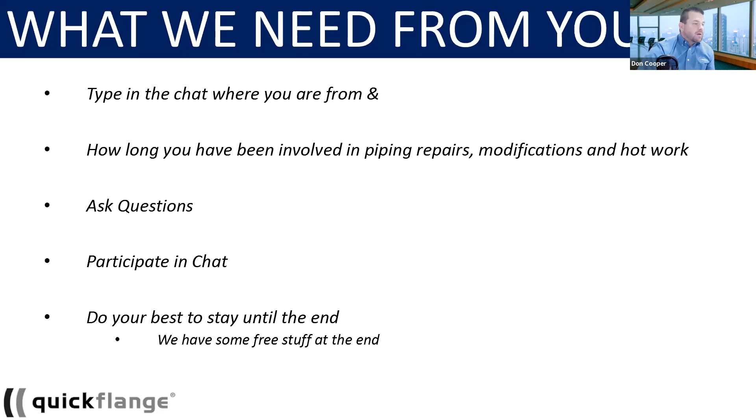I see we've got about 10 or 15 people who've commented in chat, lots of familiar names. I see Peter - how you doing, Peter? Up there in Taylor, BC. I see Richard Cleveland - how you doing, Richard? Nice to see everyone joining. So let's get on with the show.

So what are the kinds of challenges you face that might be relevant for considering Quickflange? I've gotten a lot of feedback from contacts and clients who said, 'I'm familiar with Quickflange, Don, I'm not sure if I need to join.' Often those people used Quickflange before we had CRNs and Canada-wide CRN approval, so there are a lot of places you can use Quickflange today in Canada that you might not have been able to in the past.

Some of the challenges you're going to face in today's environment, where you really want to think about how Quickflange could help, is you're faced with time and cost associated with performing hot work, particularly in today's environment.

The next area is we have a lot of clients who have had to delay their shutdowns and turnarounds, or the shutdowns and turnarounds they're going to perform in the next 12 months or so have got reduced schedules and reduced budgets. Now you need to find new ways to be cost effective and potentially even remove certain tie-ins from outside of the turnaround event, and Quickflange is a way that can allow you to do that.

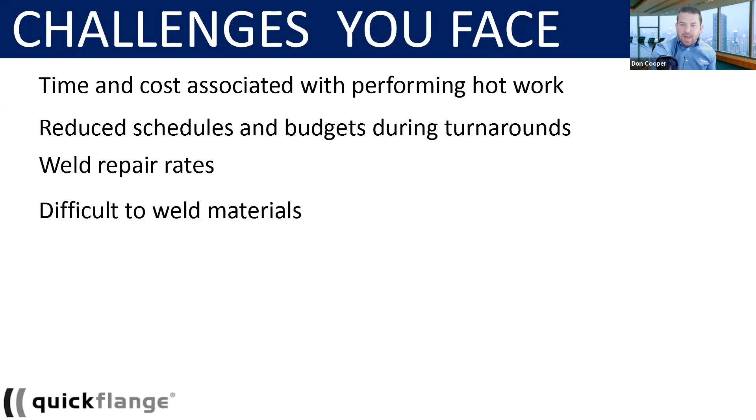Certainly, Quickflange eliminates 100% of the weld repairs you might face across your project, because in this case there is no welding. Another area you may want to consider leveraging Quickflange is difficult materials welding, or a variety of challenges relative to welding, whether that's porosity or a variety of vapors causing welding problems. I've even seen this on carbon steel, something as simple as a P1 weld getting passing vapor that was causing a lot of welding issues, and Quickflange could have solved that. There's a lot of interesting use cases.

Limitations created by weld location or weld position - we've done a lot of Quickflange work in tailings ponds or on barges where the welding position and locations were just challenging. In the offshore market, sometimes we have used Quickflange in places where you have to install a flange off ropes, and obviously welding off ropes versus using mechanical equipment is a variety of ways you can think about considering this.

The other place is, if you watched my webinar on our turnaround optimizer process a few weeks ago, a big part of that is integrated crews and how we optimize the number of people at the work face. Quickflange is a great way to drive productivity by reducing the number of crews that interface at a particular tie point and really drive productivity.

I'm going to show you a few examples at the very end of how we've been able to do turnkey tie points with Quickflange as part of the solution with just a very small one-person and two-person crew, and anywhere you've got a lot of welding to do and a tight critical path.

We'll show you an example at the end on a SAGD facility where we took the welding of 30 flanges out of the critical path. It was part of their 3-week job and it was a confined space job. We removed that from the critical path and were able to perform all those replacements, replacing welding with Quickflange, and we were able to do that work in 2.5 shifts as opposed to the 3 weeks that was planned.

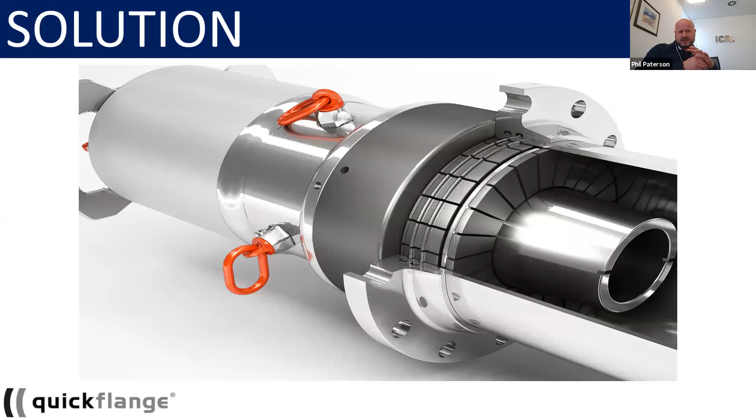So if we move to the next slide, it's kind of what is Quickflange, I guess, is the question. This is probably the power statement, the one that really tells you what it is. It's a permanent means of joining a flange to pipe without the need to weld. Ultimately, any welded flanges that you would have normally used as your traditional weld neck flange, we're here to give you an additional solution instead of the traditional hot work.

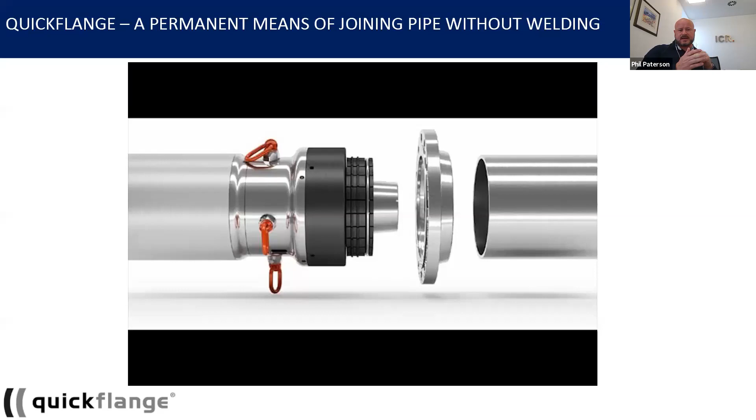Don has talked about a few of the issues you may have with hot work, which we'll go into a little bit later on. I guess the key word here is permanent, because for any of you familiar with mechanical connectors, not all mechanical connectors are deemed as permanent. They quite often are not - they can be deemed as a temporary fix. So Quickflange is approved as a permanent connection.

So if we just move on to the concept and the installation process. Where a lot of mechanical connectors, again, if you're familiar with them, they can be quite an alien type of fitting - not something you would recognize maybe as a flange or whatever the coupling. But with Quickflange, the way that the product is so simple is that we actually take a standard weld neck flange in many cases, and we simply modify it.

It's very simplistic. The technology that we're using, many of you will be aware of - it's almost adapting the boiler tube rolling that has been around for decades and hundreds of years. We've taken that technology and adapted it into the actual flange here. So once we've made up this connection, you then have an equivalent in strength and integrity to a welded connection.

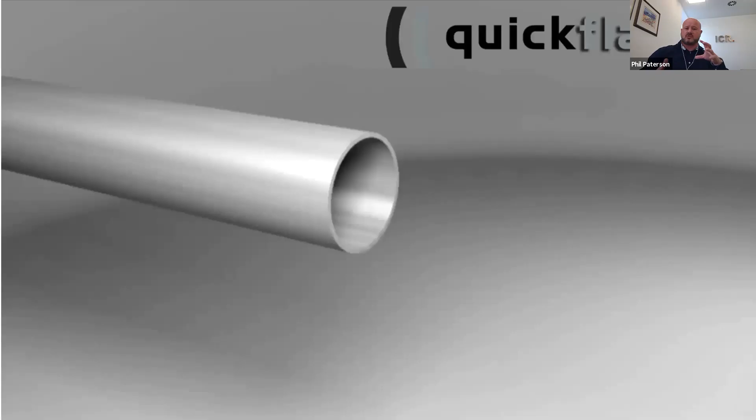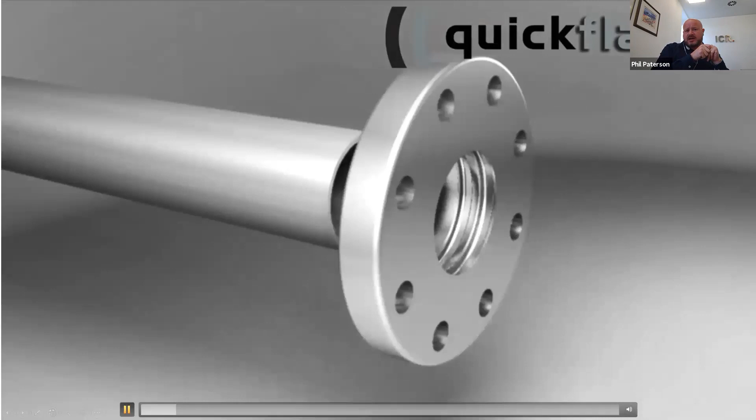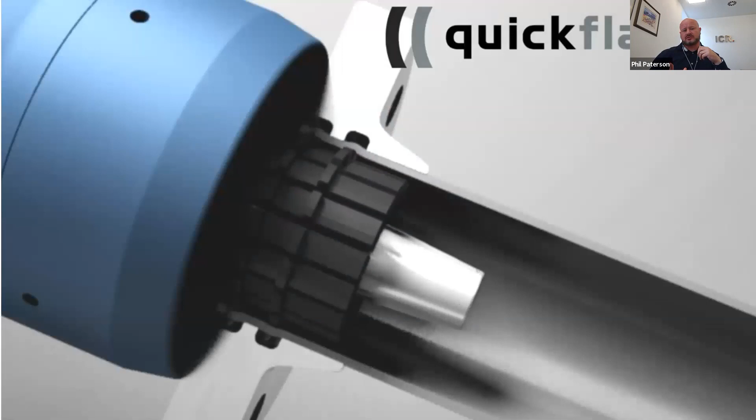So what you can see here is a video we're going to play. This flange literally slides on, so in essence like a slip-on flange. You slide the flange onto the pipe, do your bolt hole alignment as you would a weld neck flange, and then activate the hydraulic tool. What you can see here is the cone pushing out, flaring out the segments with the ridges. It's these ridges that do the deformation of the pipe, creating that metal-to-metal seal.

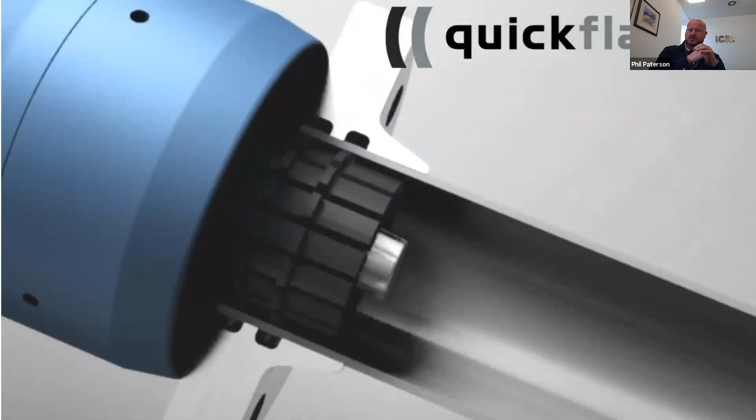Now, the video you've seen does look very simplistic, and it ultimately is. That's how simple the process is. The biggest amount of time generally in a Quickflange installation is the pipe preparation. So what we're looking for is a square cut and pipe cleanliness, ensuring there's no severe pitting or longitudinal or axial gouges in the pipe. Then you would do your activation and finish off with an emery paper finish.

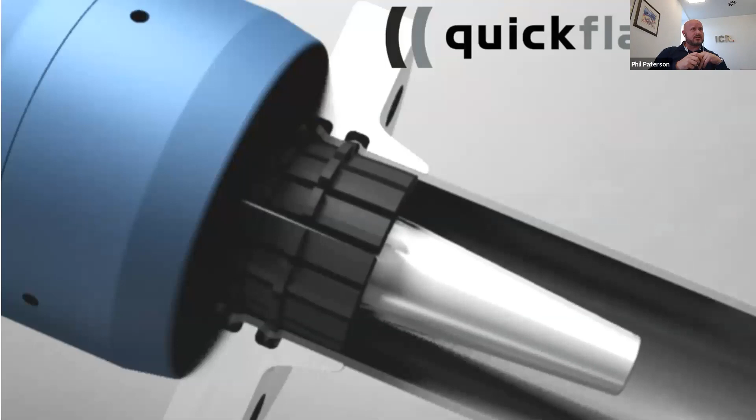Now, there is one procedure you're not seeing on this video, and that's a Belzona procedure. I'm sure a lot of you are familiar with Belzona, but we use Belzona 1111 as a product. That product is a two-part epoxy compound, a metallic compound once it's hardened, and it's machinable. We use this purely and only at the neck area of the flange as a crevice corrosion barrier, because many of you have possibly already looked at this demo and wondered, is there potential for crevice corrosion? Absolutely. So this is why we use Belzona 1111, to prevent that at the neck area of the flange.

Now, if you could maybe just go back one slide for me, just back to the previous one before the video. There is also a small lip on the inner front of the flange. You can't necessarily see it on the circular image, but where we do the cut of the pipe and the installation of the flange, there's a small lip on the flange. We also put Belzona in that area, and it is the smallest amount, but what that will do is prevent any crevice corrosion from that first seal.

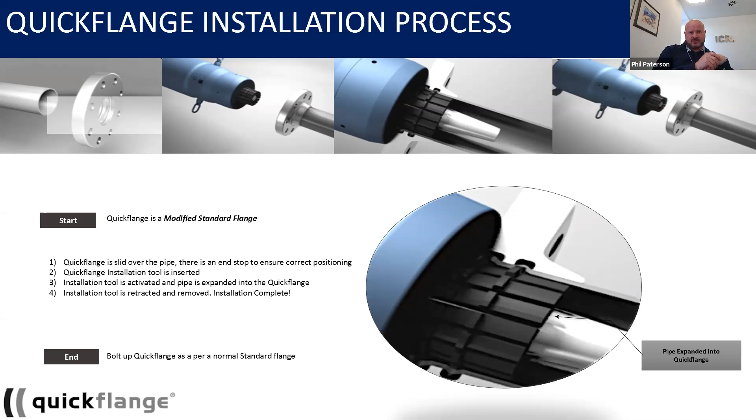Now, this image you're seeing here is a two-groove solution. We have multiple different designs based on material and the application it's going to be used on, which we'll talk about later. But in this particular scenario, you have 4 metal-to-metal seals in a two-groove solution. I have an image later on that we'll run through. Now, if you can just jump onto the range.

So, in essence, what do we cover? I guess that's the biggest question, because in most cases the product range is critical to your asset. It's 3/4 inch through to 14 inch pipework. The wall thickness of pipe we can deal with is 2 millimeters to 14, so up to 1/2 inch ultimately of wall thickness. Now, if we break that down, we are limited really on wall thickness. That's the biggest limitation factor with Quickflange as a product. It's not necessarily the pipe size, although we're currently up to 14 inch. We could go higher,

but because we're using a hydraulic tool here to do the deformation of the pipe into the pre-machined grooves, you can imagine the power we need to generate with that hydraulic cylinder. So right now it's 14 millimeters of wall thickness. That ultimately equates to up to schedule 80 on some of the larger bore and schedule 160 on smaller bore, up to say 4 inch.

Pressure ratings, well our mainstream is 150, 300 pound, for sure that's where our biggest window of opportunity has been over the last 16 years. However, clients have driven the products into the 600 and 900 pound range, and we have no issue with qualification of these products, because our engineering base for Quickflange is still in Norway, where we have an R&D department. Just a few months ago we qualified a 1,500 pound connector for a client in the US. So if for some reason we don't have that connector approved within our range, it's generally because it's either higher pressure or an exotic material. But ultimately, we have the ability to qualify that product.

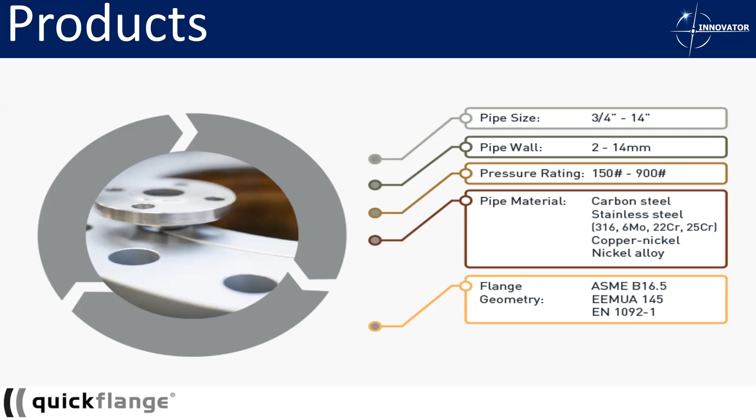Yeah, sorry, just on the material side, you answered the 316L - other stainless materials, if they're available in a standard flange, 304, 307, if you can buy the flange, effectively we have the ability to take our design and apply it to those flanges, right? Absolutely. So we have actually manufactured from F321 stainless, which has elements of titanium in it, so we do those different compounds. We did one of those in Newfoundland on a last-minute basis a few years ago, didn't we?

100%, yeah, absolutely, so it's not the most common. Obviously 316 is very common in stainless, but we have the ability to adapt the technology. Now if it's something we haven't even looked at before, it'll go through our full mechanical process for qualification, which, as I said earlier, we have the ability to do on a regular basis. Clients are always challenging us for new products, whether higher pressure ratings or different materials. So again, we have the ability to qualify if it's not within our range.

Now in the next slide we're going to go into a bit more detail about the range. If we could maybe move to the next slide, Don.

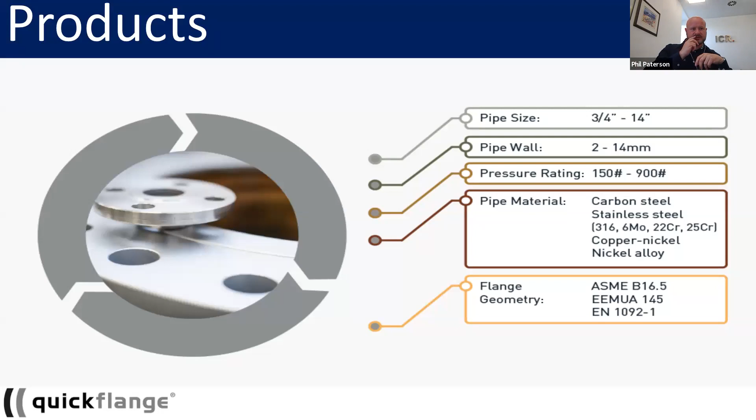This slide is a bit twofold. So this slide, in essence, is what I would call an off-the-shelf product range. This is qualified and ready to ship. In many cases, if Don doesn't have it in stock, it'll be sitting in either our Houston facility, here in the UK, or Norway. So this is what we would call and deem our off-the-shelf product.

But also, this is the size range that our training covers. What I didn't mention earlier as part of our business model is that we can actually train third-party technicians to do this installation. Now of course, for the onshore Canada market, Innovator is your go-to, and their guys will ultimately be the team that comes out and installs these. But if you have a large shutdown, a large campaign coming up, and you want your core crews trained, then we have that training model in place.

Now if they were to be trained, this is what they could install: 1 to 8 inch, predominantly from the carbon steel range and the CuNi range, and then stainless, 1 to 8 inch. And when we move into the exotics, it's 1 to 6 inch. Now you may ask, why not up to 8 inch? Because some of the exotics, we can't do the full size range, so it's limited to 6 inch in this particular area.

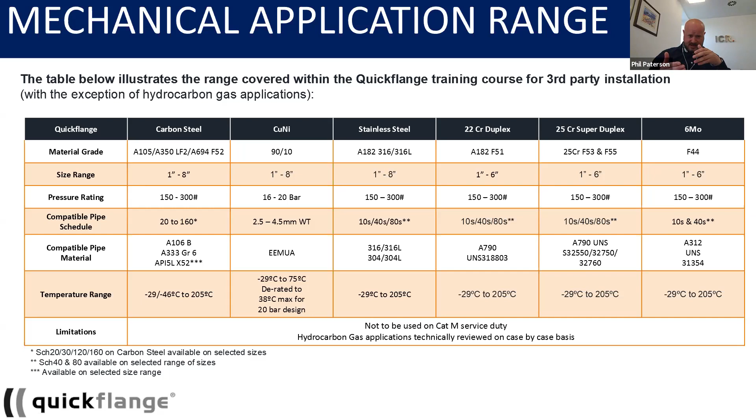But what you can also see is the compatibility for the pipe schedules that we cover within these size ranges, as well as the pipe compatibility—whether it be A106 for carbon steel or A333 Grade 6. But when we move into 8 inch and above, we may even have triple certified pipe, as you can see there, which will have API 5L X52 pipe.

It's not to say that we won't allow third parties to do this, but in order for us to train them, we want to see them build up a bit of history, a bit of experience with some of the smaller tools before we move into the larger range.

Now on this slide, as per the last one, the limitations—and I think it's important to talk about the limitations, because I'm not sitting here to say Quickflange is the be-all and end-all for all flange replacement. Of course, as a mechanical connector, we have our own limitations and the approval bodies have limitations.

So let's just quickly cover that to get it out there. Category M fluid service, so toxic fluid services, is a no—we won't actually put a Quickflange connector on a category M fluid service. Hydrocarbon gas applications, absolutely, we will apply Quickflanges on hydrocarbon gas applications, and we have many, many times. However, we take it on a case-by-case basis with the hydrocarbon. So if it's a sour service, we'll want to know the parts per million within the sour service. We'll want to know a bit more in detail regarding the hydrocarbon gas application before we will flat approve it for use.

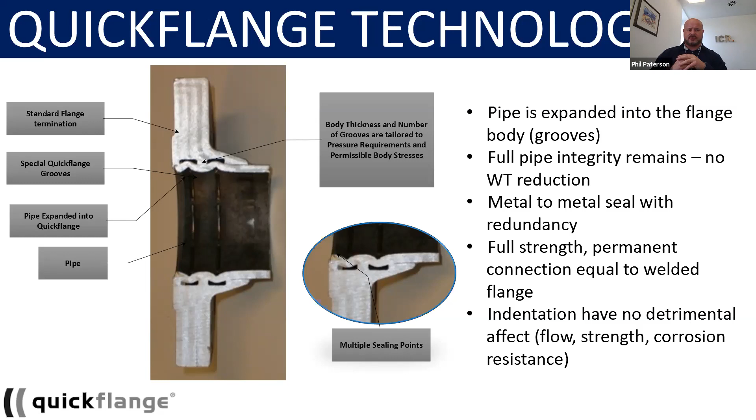So how do we evaluate every application you want to use it on? Because what we're not saying here - and this is how we want to protect you as the client, and the technology - is that we're not going to give you a batch of connectors and say, off you go, just fire these on anywhere. We want to take a controlled approach, and this is what we've done from day one with Quickflange: our engineering teams will request you to fill out an application form.

It's very basic information, apologies if it's not perfectly clear, but ultimately what we're looking for is, first of all, the pipe details - what are you installing on? What's the nominal bore and the actual size of the pipe? What's the pipe measurement, the OD of the pipe if you have it? And what's the schedule of pipe - 10, 20, 30, 40, 80, whatever it may be? And then the wall thickness.

You won't always have the wall thickness, we appreciate, but if you have a UT check - which in the majority of cases, unless it's a real emergency repair, you'll probably do a number of wall thickness checks before you do your spool replacements - if you have that, please pass it on. And then what's the standard and grade of material? Sorry Don, can you go back one for me. Apologies. There we go.

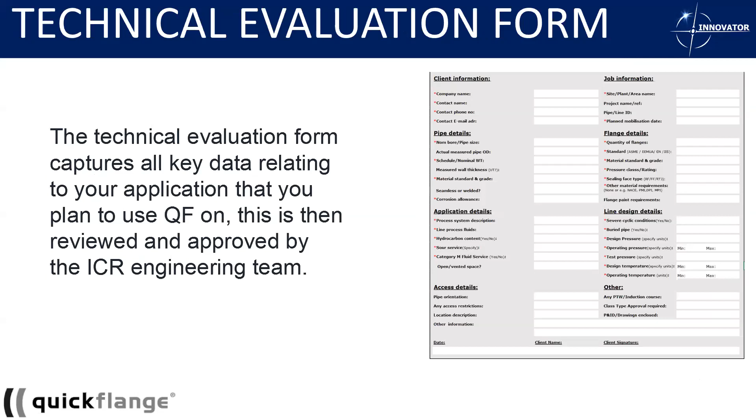And then the flange details, because we want to make sure we're mating up the correct material with the correct material for the flange, so we will not cross-contaminate materials. I know you wouldn't do that either as operators, but we have been asked - when it's maybe going to be a very temporary repair for a short period on a decommissioned line - can they put a carbon steel flange on a stainless steel pipe just to save some cost? We wouldn't do that, because that's not the right business practice. And of course, galvanic reaction can happen. We only test on mating materials, so all our testing is based on mating materials for flange and pipe.

So we will ask you the information. Is it an ASME flange? Is it the JIS or EEMUA standard? What's the material? Is it A105? Is it A350 LF2? Whatever.

You get the picture. But when we start moving into the application details, this is really quite critical, because this is where our engineering team, once they review this form, will decide what flange we're going to give you to do this install. So if you cast your mind back when we talked about hydrocarbon gas, this is where you're going to highlight that.

What's the service process? Is it hydrocarbon, is it gas, or is it liquid? Is it sour service? Is it category M?

And then on the line details, if those answers are acceptable, the line details are also critical around the design. What's the design temperature of that line, and what's the operating temperature, minimum, maximum? Same with the pressures. And then is there any severe cyclic conditions to the line, whether it be vibration or temperature fluctuation? We'd just like to know these up front.

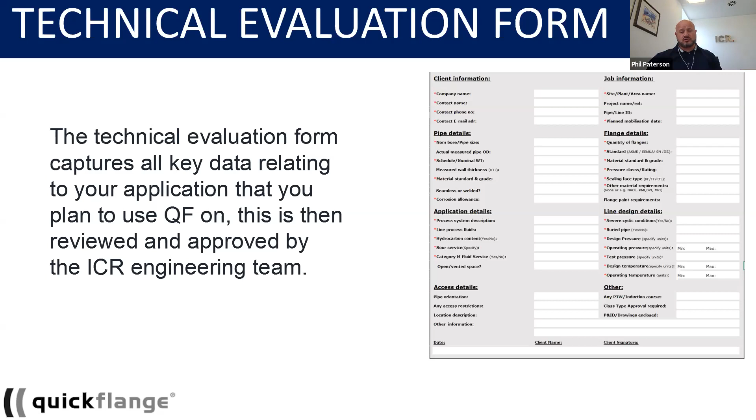Now, what do we do post-installation or during the installation? How do we protect the technician, the client, and us? Again, this is part of the QA/QC. This is called a job verification document. We commonly refer to it as the JVD, and this is completed for each and every Quickflange installation.

Now, we have over 10,000 Quickflanges installed around the world, and ultimately we can tell you who's installed them, but more importantly, where have they been installed? What was the line number? What was the condition of the line they were installed on? So if you were to come to me in 4, 5, 6 years time and say, Phil, can you tell me where we have all our Quickflanges installed on the site? Then I can pull a list very quickly down to the actual line number.

But more importantly, I can even give you the serial number of the flange that you installed, because every single Quickflange is uniquely serial numbered. They all come with their original heat certs and heat numbers from the original mill certs. So that's the traceability section.

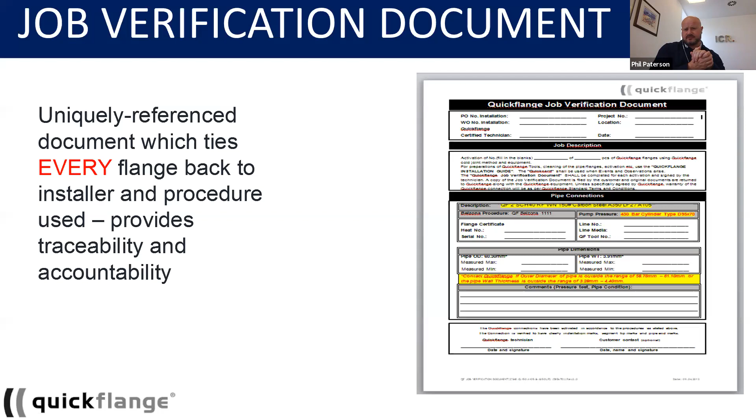So there, I don't believe—Don, you can correct me if I'm wrong—but I think we have one for every single province within Canada. Every single province and every territory, Phil.

So a couple of points, because we've had a few questions around QC and around data collection. One, all the CRNs are registered to Innovator's quality programs across the country. So we started by getting TSSA approval, that was actually our first jurisdiction, and then we followed with ABSA registration. Then generally the other five jurisdictions that cover all the other provinces and territories followed suit. The big thing is it took us about, I think, six years to get CRNs, not because of any engineering challenges, but just because the jurisdictions didn't understand how this worked.

We finally got to a place where we did proof testing on all of our applications. We used UG-101 proof testing and did destructive-to-failure tests on all the connections. That was really important because it established the protocol, not just for getting our initial catalog of fittings registered, but also an acceptable protocol so that anytime we wish to register more designs and materials, it's a seamless process now. All the jurisdictions know exactly how we're going to submit, and it streamlines the process to be very quick.

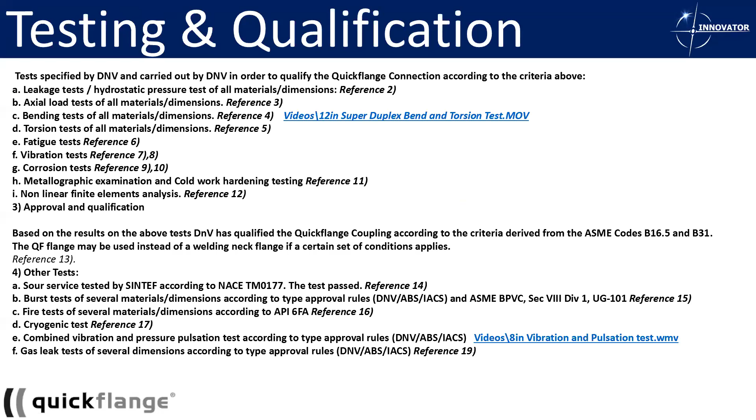Let's move on to testing now, Phil. Yeah, absolutely. I know Peter had some questions about vibration, and I think we've got a video we're going to show with some of the vibration testing. So we absolutely do, and I'm not going to walk you through every test because even I might fall asleep on that one. But every single test data here, we're 100% transparent with all the test data, and we'll share any of it with you.

Really, this slide is just a highlight, and I guess we kind of just covered it there on the previous slide regards the approval bodies, as to the extent that we've had to go through to qualify Quickflange as a product, whether that be for the onshore market, the offshore, and various different industries.

But what I do want to highlight just now is that although we have type approvals, and many type approvals allow you to test X and Z, and Y in the middle is automatically qualified because you cover that parameter - in that scenario, that's not what we do. We don't interpolate results or extrapolate numbers from previous tests. Every single size, schedule, pressure rating, and material goes through full mechanical testing before it is allowed to be released for sale. So every single configuration within our range has its own test certificate.

When you are planning to use a Quickflange, I can issue those certificates up front, and the team at Innovator, as part of the documentation package, can give you those results to let you see what we have tested the connector to. Now, the question might be, how do we know what qualifies and what doesn't?

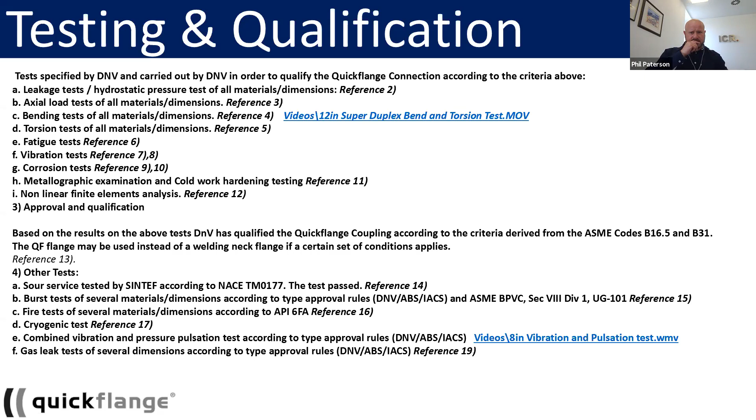Now if we move on to the next slide - this is a video of a bending and torsion, bending moment test. This was going to actually go on an FPSO off the west coast of Africa. Although we do bending and bending torsion tests as standard, what you'll see here is the severity of the bending moment. That's the Quickflange at the end, bolted to about a 2-inch plate jig, and we have another Quickflange at the near end with a blind. So it's a fully blinded Quickflange spool, pressurized to 20 bar of pressure.

Now if we run the video - it's maybe just the streaming here, but you can see the bending moment and the severity. This went through tens of thousands of bending cycles with no failure. This ultimately gives you a stress intensification factor of that connector, which we can also do.

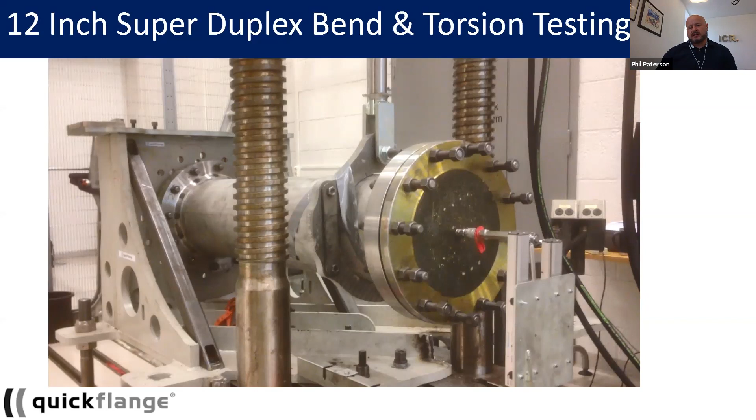You can see the bending moment only there - the only guest on here that's going to have fitting work that severe for bending moment is probably Paul Walsh. Hey, Paul. Okay, kidding, Paul. But I think what I want to highlight is just the severity of the testing. And, a bit tongue in cheek, if you're subjecting your pipe work to that much bending moment, you've got bigger issues than a Quickflange leaking.

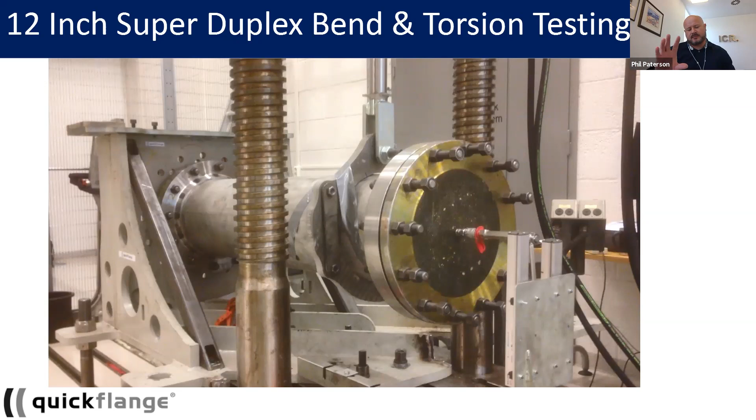It's a really important factor, and I'll go on to my next statement, but let's move to the next video.

This will show. Peter had a question about vibration earlier, so I'd like you to speak about vibration a little bit. Yeah, so this is an exceptionally quick video, so I don't know if we can put it on a loop at all there, Don. But anyway, let me just talk you through the setup that we have here.

First of all, you can see this is witnessed by SINTEF, which is one of the major approval bodies. What we have is a dome-ended spool here, and the silver flange is a quick flange. The gold one, which is just the coating, is actually a standard weld neck. Now, what you can see here, this is actually a custom forging because this is a little bit thicker than the traditional weld neck that it's bolted up to. But everything is designed to ASME B16.5 configuration.

Now, this was a vibration and pulsation test. So you can see it being held in the vibration jig. And then just on the top end, you can see a hose is going in and it's giving a pulsation.

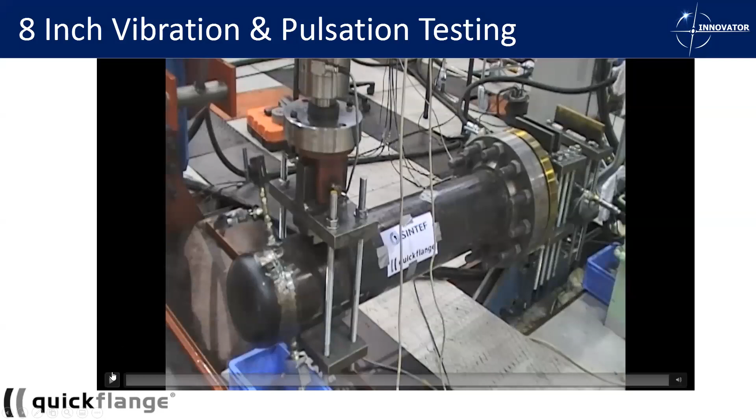Now, I don't know if you could run the video again for me here, Don. So it's so quick. This went through in excess of 10 million vibration cycles and 500 pulsations. All right. Sorry, Don, keep going. Sorry, I jumped ahead there. I was trying to replay the video while you're speaking. That's all right, no problem.

This test actually took 5 days in total to do. It should have been done in 3. But ironically, and this was not the design behind the test, because this is actually hooked up to a weld neck flange, which is welded to a pipe held in the jig, the actual weld cracked twice during this test. So ironically, the weld gave up versus the quick flange. The quick flange had no failure to this.

Now, this video is struggling to stream so well, but we can share the link to this video to anybody that wants to see it. As I say, we appreciate the weld neck was probably subject to a bit more load, but this was a very good test. This is part of our type approval testing that we need to go through. So it has been tested for vibration, but not just vibration, also pulsation at the same time.

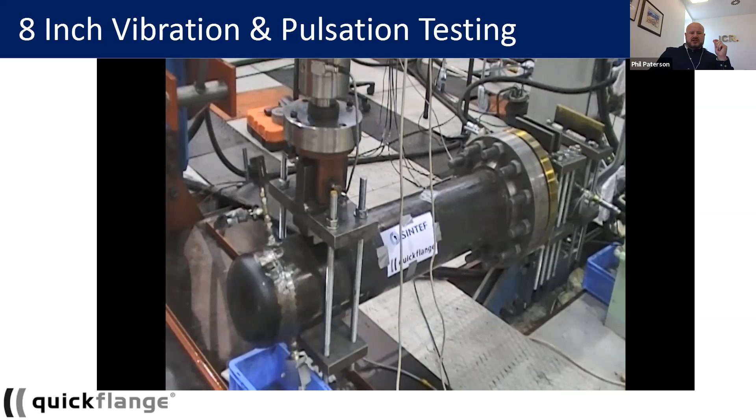The next slide gives you a bit more of the mechanical testing that we do. What you can see here is typically an 8-inch, the same connector as what was in the vibration test. You can see the values there that we're subjected to under bend and torsion, whether it be 110 kilonewtons, but most importantly, it's 140% of ASME's requirement. So that's the key here.

What we also have is the pull test, the actual load testing. This is 100 tons of pull with no failure. The reason why we always pull, we do actual test of failure, but on this particular scenario our machine couldn't pull beyond 100 tons. So again, a little bit tongue in cheek, if you're exposing your flanges or your piping to that amount of load, then you've got bigger issues than a quick flange leaking.

But this is what I wanted to highlight: what you will never have with a quick flange is a catastrophic failure, because even under an actual load test, all you will have is a loss of pressure, and it'll be a weep or a drip from the neck of the flange is all you'll get. As you can see on the burst testing, the pipe, as I mentioned earlier, is the weakest component. Your pipe will let go before the actual flange connection. Ultimately, whilst the flange is under pressure, I can't say it works better and gives you more performance, that'd be wrong to say. But as the pipe is pushing into the flange and those pre-machined seals, it's never going to give up.

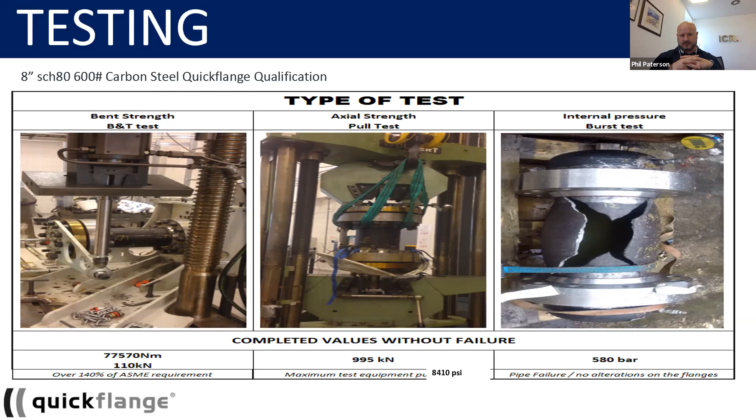All right, Don, I have a question for the audience before we jump into the next slide, because we're going to talk about installation times versus weld times in a moment. Just to frame some reference, one of the big benefits outside of everything we've talked about with Quickflange is eliminating hot work. In the context of a turnaround or maintenance in a live plant situation, I want to ask the audience what you believe is the time and cost associated with getting ready for hot work versus the direct cost of doing the physical fitting and welding, as a percentage. How much does hot work preparation cost and time represent as a percentage of the total project compared to the actual final execution?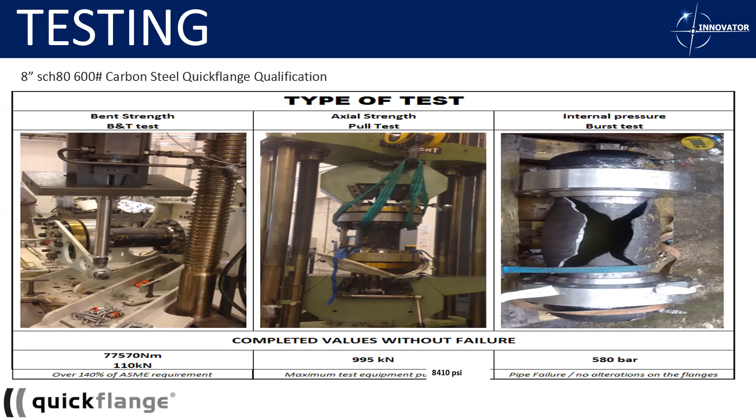Just throw in a percentage, mention it in chat if you could please. We're going to move on while you're commenting and talk about the preparation for hot work versus actual, and we're going to talk about installation times. Go ahead, Phil.

I'll throw a caveat right away before I get going, because if I have any welders here, they're going to be spitting dust at this slide. This is based on offshore welding norms, these timings that we've taken on this chart. I appreciate that for an onshore market it will be different. But regardless of your welding norms, as Don just asked, there are so many inputs to a hot work that are often forgotten about, because that's the wrong term, but you do them because that's what you have to do in order to perform a hot work. These are the processes that we're saying we're going to take out of that pain, whether it be an admin pain or just the physical pain of achieving a hot work.

So let's take the basics. Think about a hot work, what's involved. From the cut to the preparation, let's even break that down. It's not just as simple as doing a cut, you actually have to cut and bevel the pipe. That's a specialist tool, potentially a specialist person. You've then got any pre-heat treatments, you've then got the weld itself, and you've then got the stress relief, potentially, and NDT requirements.

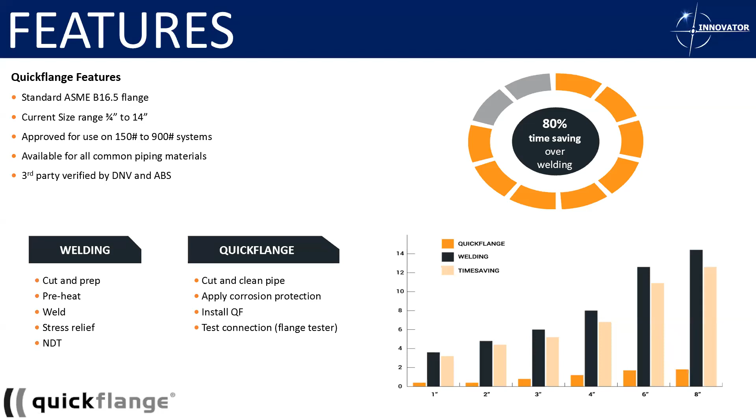Other question that you mentioned earlier, but I just want you to repeat it. Deepak asked, if a leak does happen on a hydro test, how do they proceed?

Okay, so first of all, there's a few visual inspections you do, as I mentioned. During the hydro test, if you have a leak from the Quickflange after install, we would reinsert the tool. Part of the procedure when we install a Quickflange is that we mark the flange, the pipe, and the tool, so if we need to reinsert the tool, it goes in exactly the same position as when we originally installed it. So it's just a simple reinsertion of the tool and reactivate it to the correct pressure, or the required pressure on the JVD, the job verification document.

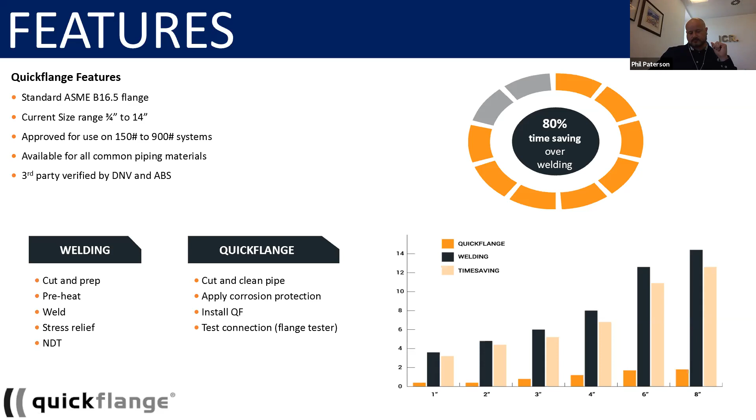Great, thanks Phil. 99 out of 100 times that will cover the issue.

Now I guess there are scenarios, I'm not going to go through every one, because I'm sure everybody out there can probably see the benefits of where you can use it. But before Don goes into some of the case studies, I want to take a moment and think about the scenarios you have. When we built the business up from the beginning, and I started with the business 11 years ago, we were still in the very early stages, and predominantly Quickflange was just used as a tie-in. So where you were going to cut out a section of pipe, you would prefabricate a spool, drop the spool in, and put 2 Quickflanges in as a tie-in piece, and off you go.

But as we started developing the product, we found that clients were having more and more issues in the tie-in scenario on the modification side, where you cut the pipe, you've got reduced wall, you have to move the cut line, and then your spool doesn't fit. So what we now do is a lot of on-site spool fabrication. This gives the client so much more flexibility to install their spools. You can prefabricate elbows and T's, cut them to size, and do the installation with a lot more flexibility.

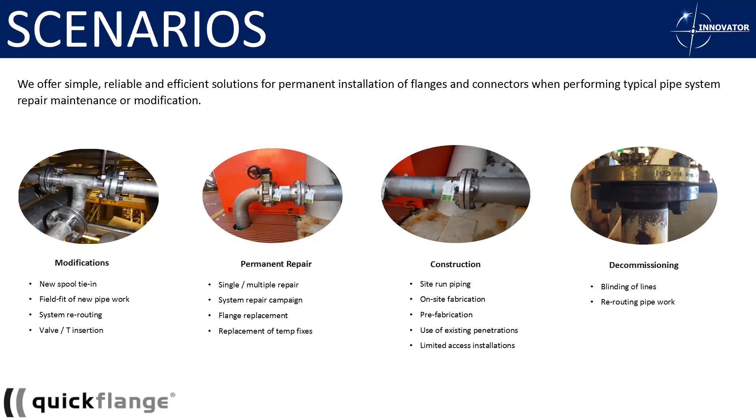Well, let's dive into some of the applications that we've done. Plenty offshore, but we've also done some really fun and interesting applications onshore in a variety of places that you might not expect. So I'm going to share the first.

This is actually the very first Quickflange that we've performed in Canada. So in this situation, what we have is a SAGD client in the Cold Lake region here in Alberta, who had 3 oil treaters with desanding headers that were inside the pressure envelope of the vessels. And as you can see in the top left-hand corner, the fabricator didn't use standard flanges. They manufactured some plate, and they made these plate flanges, which had just gotten terribly corroded, and they were getting leaks and whatnot, and it was causing some efficiency issues inside the vessel with desanding and dewatering.

So the client, this was a critical path project. The client had 3 vessels, a total of 30 flanges inside confined space. They had a massive critical path schedule. This project of replacing these 30 flanges was 3 weeks in their plan, with massive cleaning, steaming, and degassing of the vessels, confined space, breathing air for the welders, man watches. You can imagine the entire requirement for confined space welding and cutting.

They also had a big concern with arc strikes as they were trying to remove the flanges and do the welding. So originally, they had more than 180 schedule hours, 500 plus man hours planned in this job.

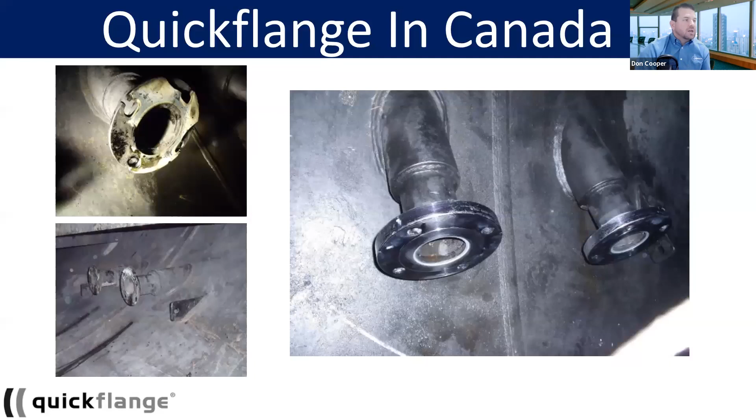So this is a SAGD example. Now this is a different example I'm going to share with you next. This is a fire water system at the Peter Lougheed Hospital in Calgary, in a utility room on an active hospital ward. This room was literally 12 feet away from the nursing station, on an active ward with patients in the ward.

They needed to install an isolation valve because the way their fire water system had been designed, they had no isolation across multiple floors to be able to do any changes or rerouting. And they wanted to install this valve in this fire water system.

We went into this job on a night shift with 2 technicians. We performed a freeze plug on the top and bottom of the tie point location. After the freeze plugs were established with liquid nitrogen, we were able to cold cut out the initial spool, then we fitted the first 2 quick flanges on either end of the open-ended pipe.

We then took the pipe we had cut out and fabricated a new pup piece spool with 2 more quick flanges, installed the valve, installed the spool, bolted up the connections, and did the hydro test on all 4 of the quick flange connections, finishing that tie point in a 12-hour shift with 2 people in a closet on a live hospital ward. No hot work required. The entire activity was cold.

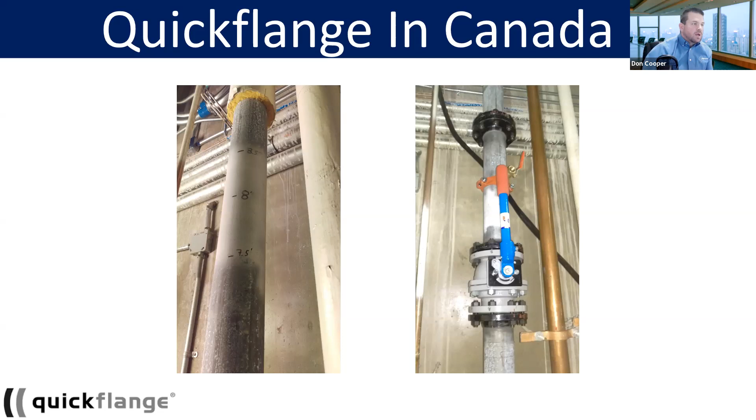Now here is a third example. This is a refinery in Sarnia, Ontario, and this was an underground 6-inch propane line that the client needed to do a tie-in on. They had a lot of concerns with LELs, and a major welding concern because of the presence of benzene.

We were able to cut and prep the line, fit the flange, and hydro test, and the entire activity, including the confined space into the trench, or I don't know if you'd call that a trench so much as a hole, was performed, the total activity for everything was 6 hours.

So those are 3 examples of work that we've done, and there are many more examples. But you've got a confined space in a vessel, a utility closet for a fire water system, and a propane line with welding and benzene issues. All of these were very small, integrated crews, what we really call a turnkey cold tie point, leveraging a variety of technologies from cold cutting and freeze plugs and hydro testing, and obviously the headliner of the show being the Quickflange technology.

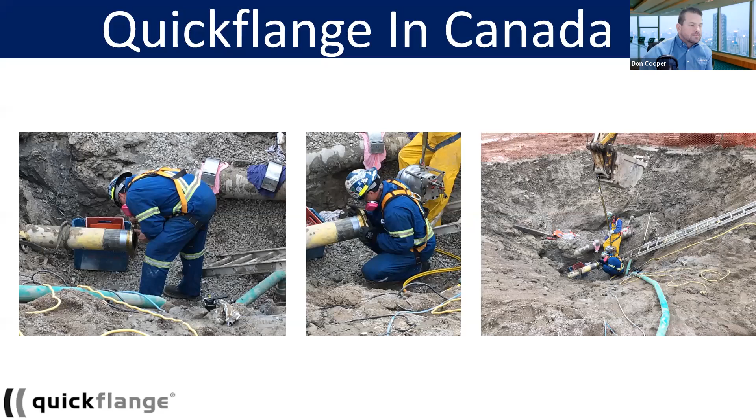So let's answer any final questions. We answered a lot of questions throughout the presentation, but we're going to just jump into some Q&A.